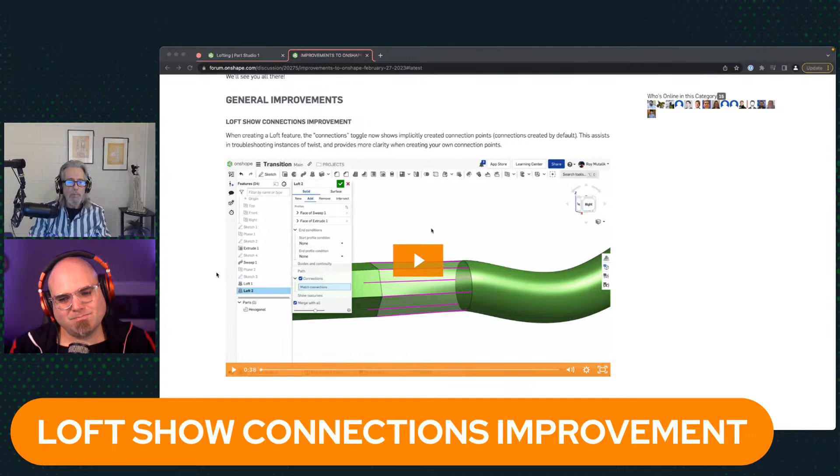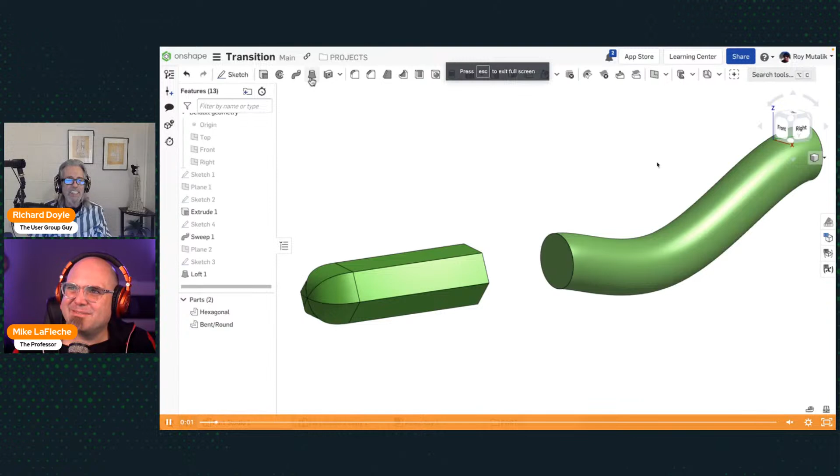All right, let's talk about the first thing. This one I actually like a lot, because it's actually quite flexible, no pun intended. People sometimes want to twist, and sometimes people don't want to twist, right? I did, I got a kick out of the video. I assume you're going to show it here, but let's show and then we'll do some live stuff with it. Yeah, but in the description of the video, it talks about troubleshooting twisting, and then when we get to the end of the video, you'll see why I was a little bit surprised.

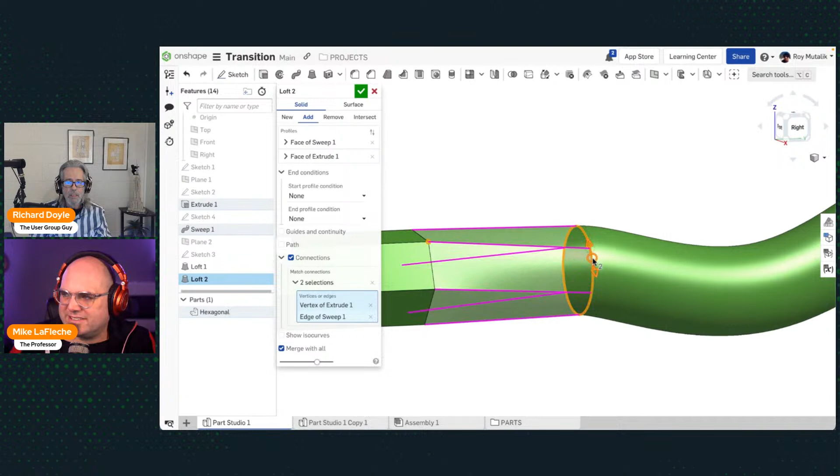So it looks like Onshape did a fairly decent job here with going from the hex to the circle without any rigmarole, it's pretty good. But let's say you want to introduce some twist. Here we're just picking random points, and of course recently, I think several updates ago, we added the ability to move those connection points, but it was actually quite some, what's the word I'm trying to use, like the way the lofting works. You can do a lot of flexible things with it now. And we had those connectors, but they just weren't as available, I would say. They were there, but they were kind of hidden, right? Now they're on full display, right?

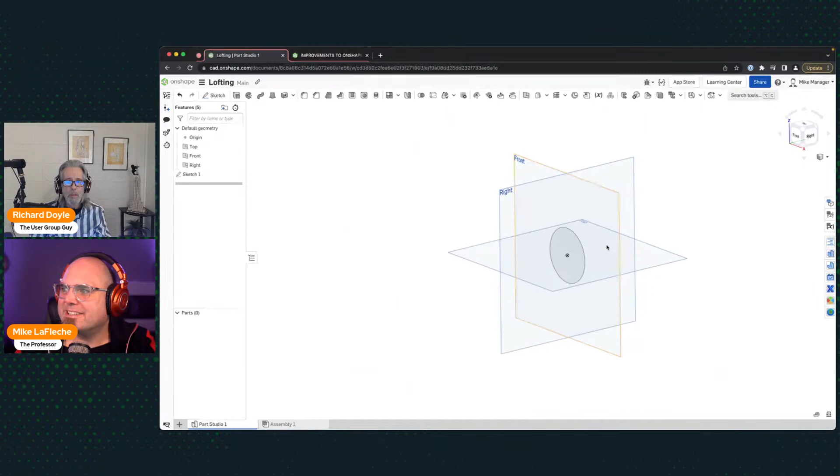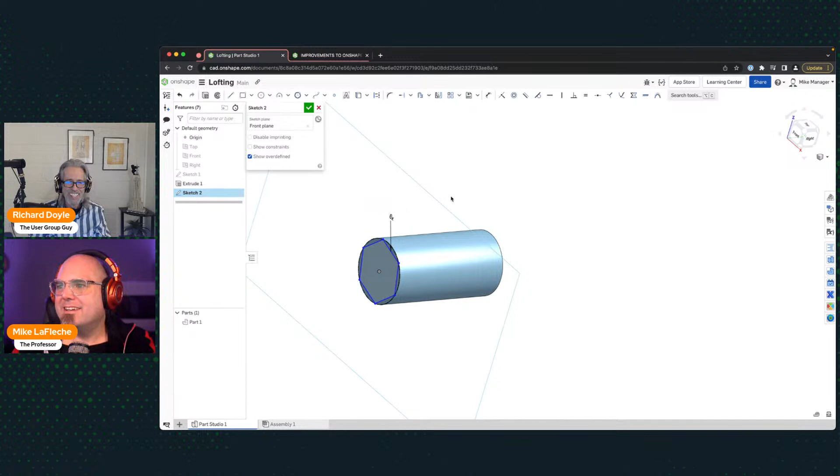Right. Vertical there. There we go. That looks good. Fully defined every time, eh, Toby? Yeah, that's right. You got to have it fully defined.

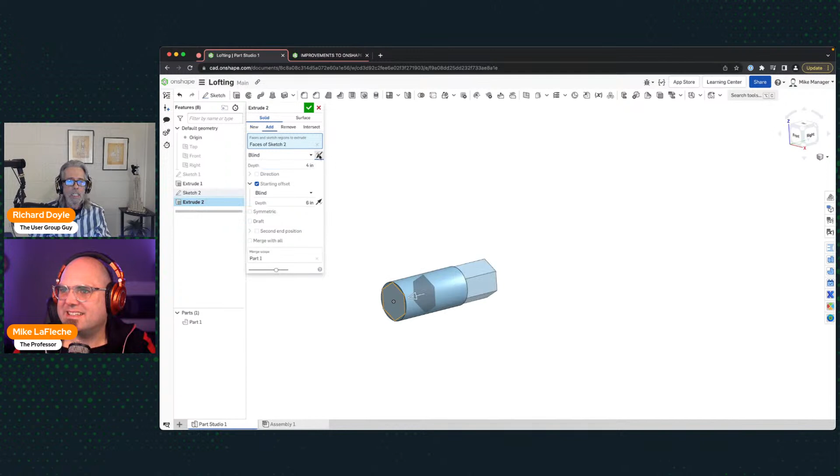All right, so I'll extrude this. If you haven't seen this yet folks, this was new in the last release, the starting offset with your sketches, and that's just awesome. I love that new functionality. Exactly. So now we've got a new solid right there.

All right, so we got a little space. Obviously you could control this by splitting it up into 6 segments. Sometimes you can do it, but sometimes you have to. But let's just go face to face, right? Because you can do that too. I didn't need a sketch to put those in. A lot of people don't realize you can do that.

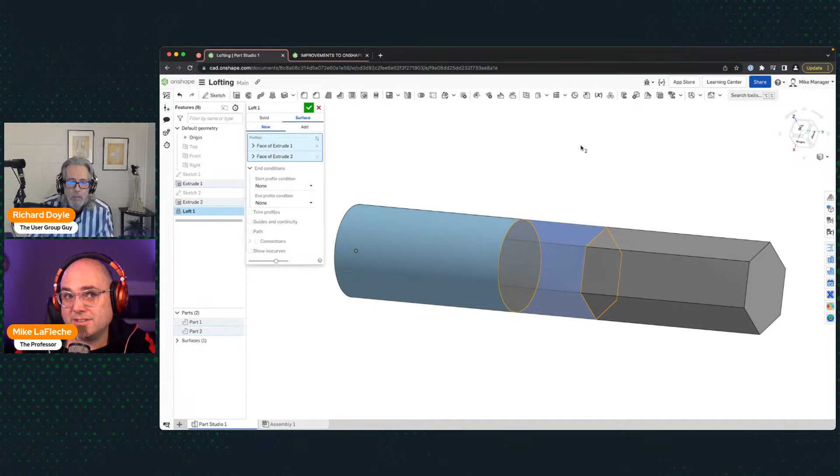Yep. But here are the connections, and you can see right away the live preview. It's the first time I've tried this. And now, of course, I can just take... oh, that was the wrong one to move. There we are.

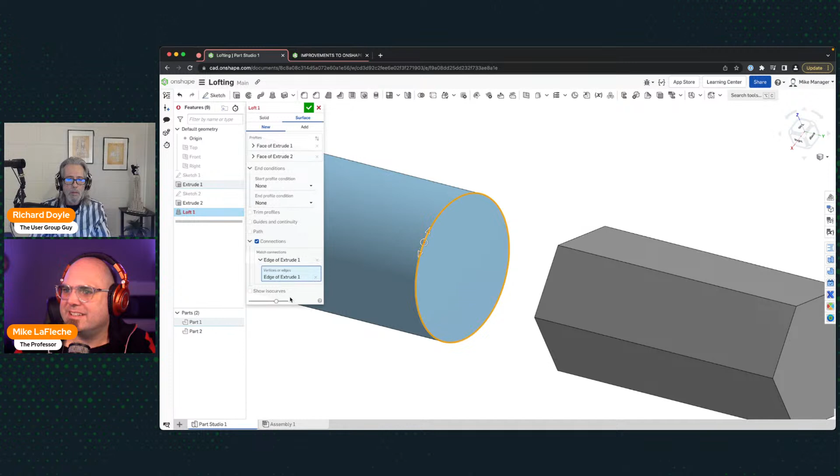Now I can just go in and work it around. Let me turn that off just for a second. Try that. All right, there we are. So I picked the beginning point and the ending point that I want it to work with. Right, and now I can just drag that out. And of course I could start with a normal to profile or things like that to do some more interesting blends, right?

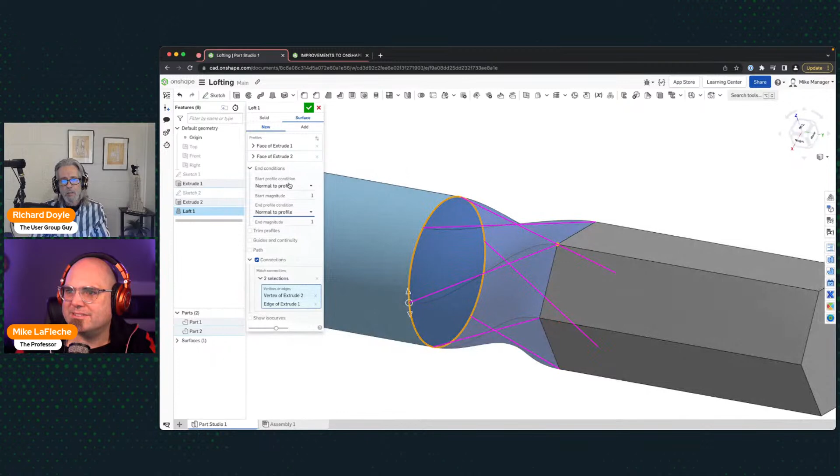So that's another surface right there. I could have told it to add it and merge it with all the pieces. Well, let's see, there might be something popping up, but you can see that's pretty easy.

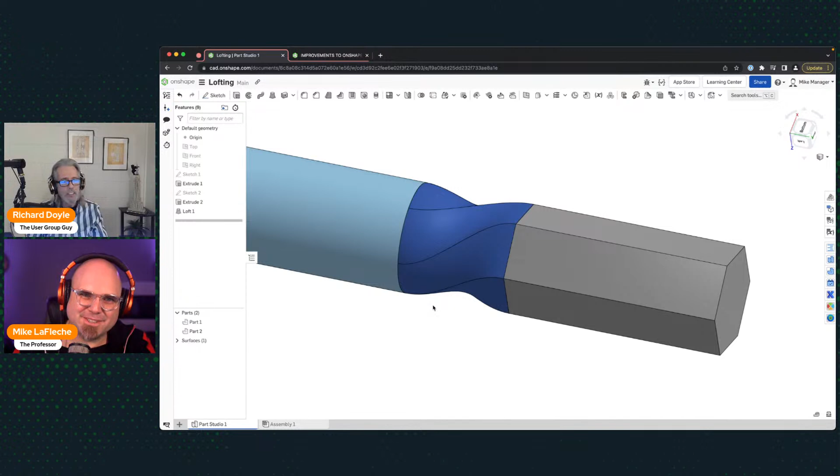Now we can introduce a twist with your loft on purpose, or you can troubleshoot that accidental twist. Yeah. Accidental twists are easy to troubleshoot now.

So wicked easy. The easier and easier these surfacing tools get, and different things - it doesn't always have to be a surfacing tool, but things like lofts and sweeps. The easier they make it for people like me to do that, the better chance I'm going to have of ever learning how to do really good surfacing. So yeah, I appreciate that.

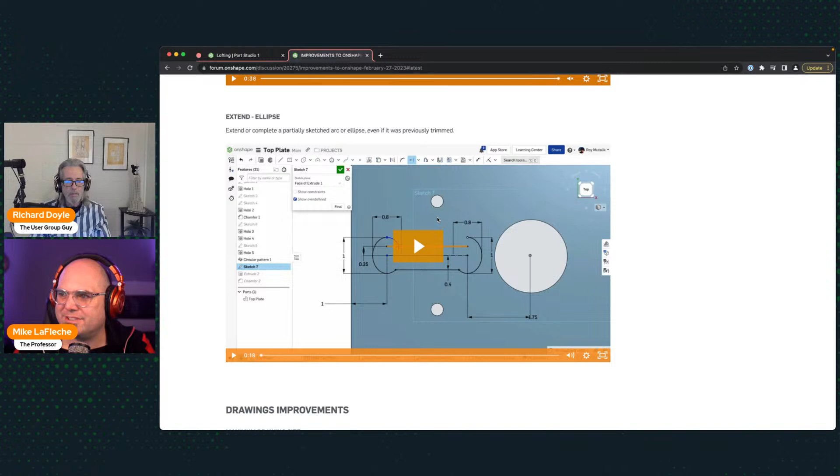I'm in the same boat. I haven't done a lot of surfacing lately. I've been getting ready for Onshape Live, doing some surfacing kind of prep, and it's really given me a new appreciation of what's happened in the last year or so with the features that have been added. And I've seen that model, and it's a really good one too. Cool, a little sneak peek. There it is. Nice, yeah.

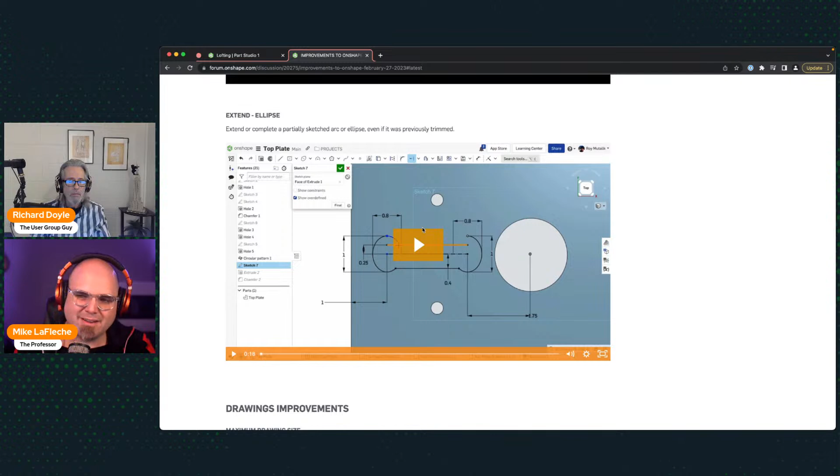Anyway, extend ellipse. So of course there's lots of sketch operations you can kind of get by with, but this just makes the quality of life when working with any kind of elliptical arcs better, especially when trimming and extending and doing things like that. So essentially, let's play the video here.

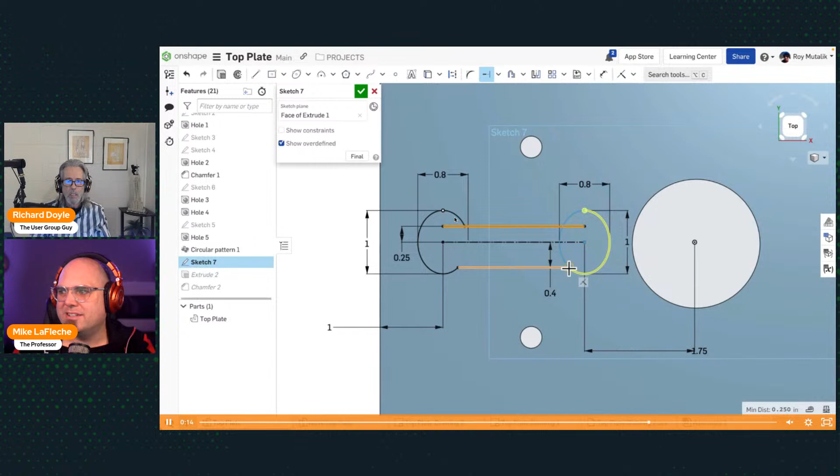See here, we have a nice kind of dog bone shaped slot, and we want to take this elliptical shape that we drew as an ellipse and just use the extend tool. You can go to existing points. You can fully close an ellipse to get it back in, or a circle or an arc actually. So if you've trimmed a sketch circle, or if you've created an arc, you can actually close those as well.

Oh, interesting. Yeah, you've had a chance to play with this, it sounds. Yeah, just a little.

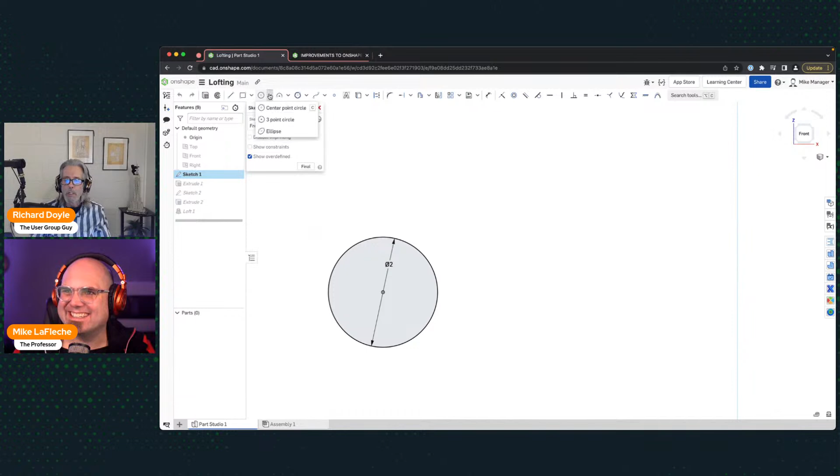And I will warn everybody ahead of time that's going to try this for the first time - if you came from some other CAD systems, you can't drag the points together yet. I want everybody to go ahead and submit that as an enhancement request. We'd love to be able to drag those points together. But for now, you'll need to use the extend tool to get that done.

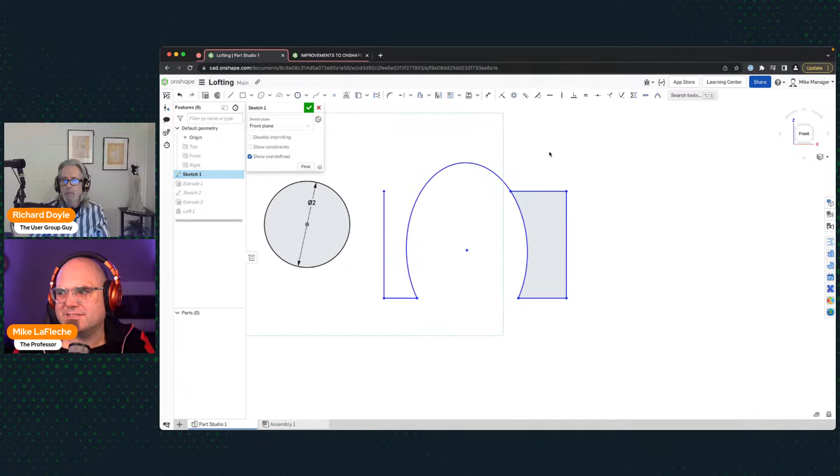Yeah, you can see if I try doing it like that, it's not quite going to do it. But if you hit the extend button, it'll go right to the ellipse itself, to that horizontal line. It works perfectly, and you have a nice entity to work with right there. So it's nice, good stuff, good sketching improvements.

Cool, all right, basic stuff there. Let's continue. All right, this one is for those airplane designers out there.

Or frankly, anybody who needs to produce output that can be used for cutting on a water jet or something like that.

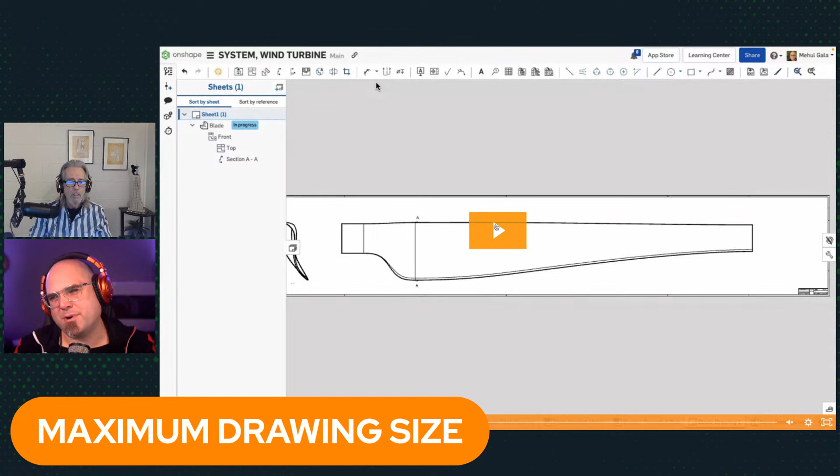So the maximum drawing size. Exactly, so we're not limited to a certain shorter range. Now the range is much larger to accommodate if you needed to do a full size print of this wind turbine blade, which actually you probably couldn't do because these blades are like football fields long sometimes. But instead of a 1 to 128 scale, you might get away with 1 to 12 or something like that. So there's tons of long, slender components that you need a scale print for.

And in this case, a wind turbine blade is obviously something I've seen before. It's a print that I've been to many manufacturers of these over the years, and I've seen prints like this in the past where you have the big long scroll.

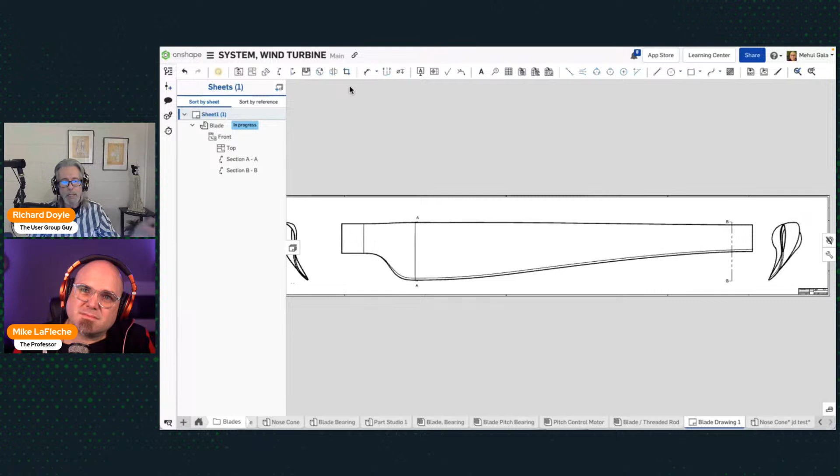I am reminded of a story when I was 19 years old working as a mechanical draftsman for a little scale company. They wanted me to create a flow chart big enough to be read from our booth at a trade show. So I actually drew it on a rolled up piece of paper that I kept unrolling and unrolling. It turned out to be about 20 feet long at one point, and just D-size high. It was a combination of mechanical drafting with pencils and Kroy lettering. I don't know if anybody remembers the Kroy machines.

So it was fun when I saw this. I kind of harkened back to 40 years ago.

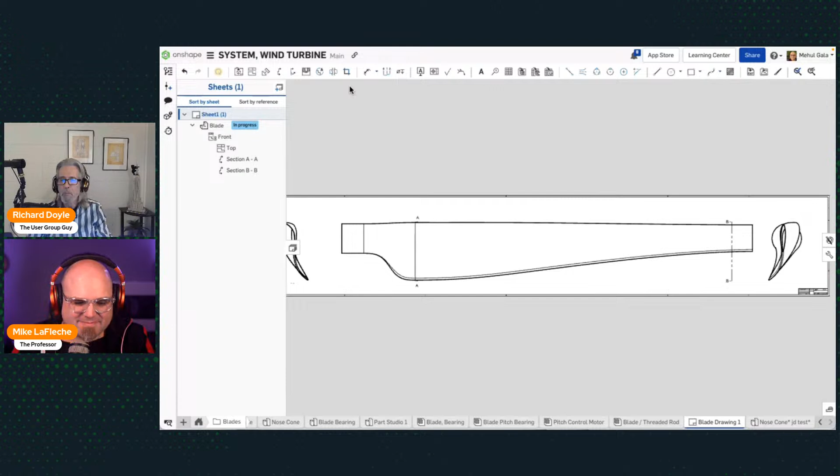So yeah, you would just go in, and I presume, let's just give it a whirl here. Let's create a drawing of this piece right here. Custom template. Let's go ahead, might as well go feet and inches for something like this.

Where are we? Let's do this. I think I need to change it after. I might be wrong, but you can be wrong with me. All right, let's see, format, custom. I think I will probably have to make the format. If I read the actual thing, the maximum size of an Onshape.

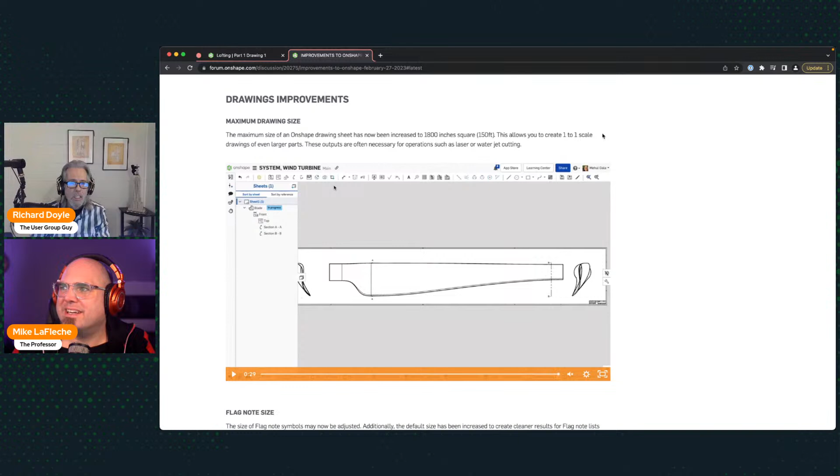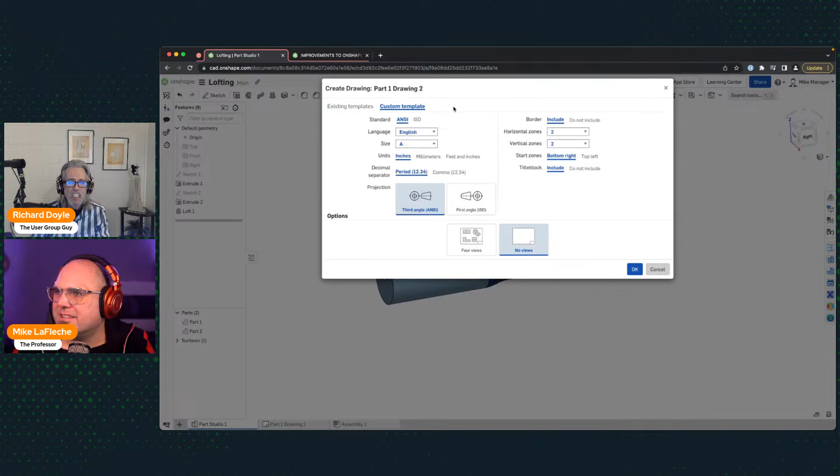Okay, these output, I am betting at this point that you would make your template. Yep, the size that you wanted. And then you'll scale it down to whatever value you have to get your output. Right, let me just try one more thing before I eat my hat. This is one I did not check ahead of time. My apologies. But if I go to custom, I'm not going to see it anywhere here, I don't think.

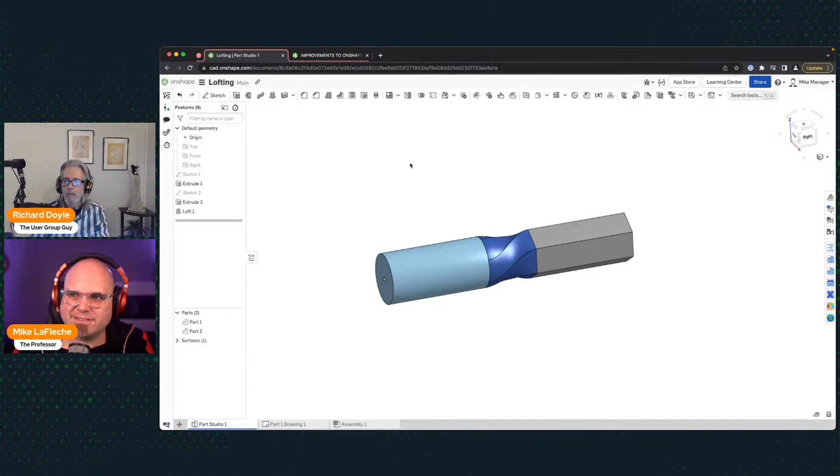Yeah, so I'm presuming that it would be a custom template ahead of time. You import the DWT file and you go from there. So I'll double check that and put something in the show notes for everybody, because I haven't had a chance to try that one out yet.

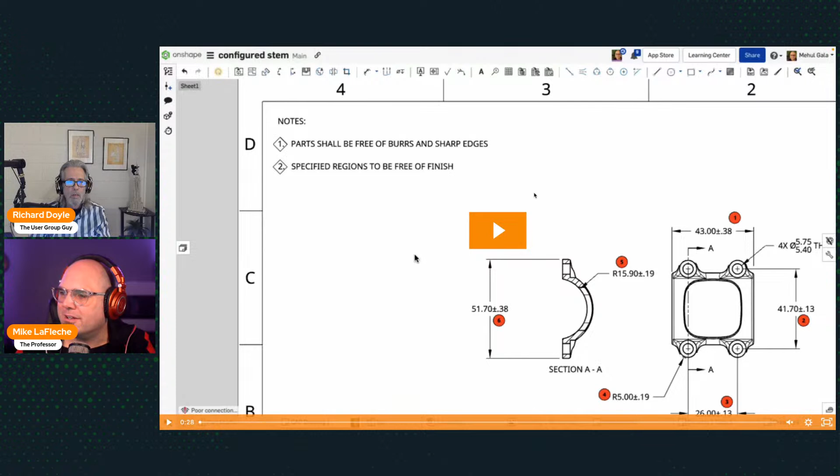This one is actually quite nice, the way the flag notes are evolving now in drawings to have a nice workflow essentially. So it's not just the ability to have a flag note on your drawing, but have the flag notes be meaningful and useful as you continue to work on your drawing. This example does a really nice job. Mehul Gala on the Onshape team did a great job of explaining here.

But we have this group of notes, right? We highlight these and we're going to turn them into flag notes. So that turns them into a flag note, which doesn't have to be a flag. It can be a diamond shape or whatever you want. You just select it, and now we're going to use our call outs, and you'll see the flag note gives us item number 1 and item number 2 in that list.

If you went by that fast, let's pause it right here. There we are. See what happens? That 1 and 2 is actually representing the 1 and 2 of the notes underneath that call out screen. Okay, very nice. So it's smart, it's connected to these notes.

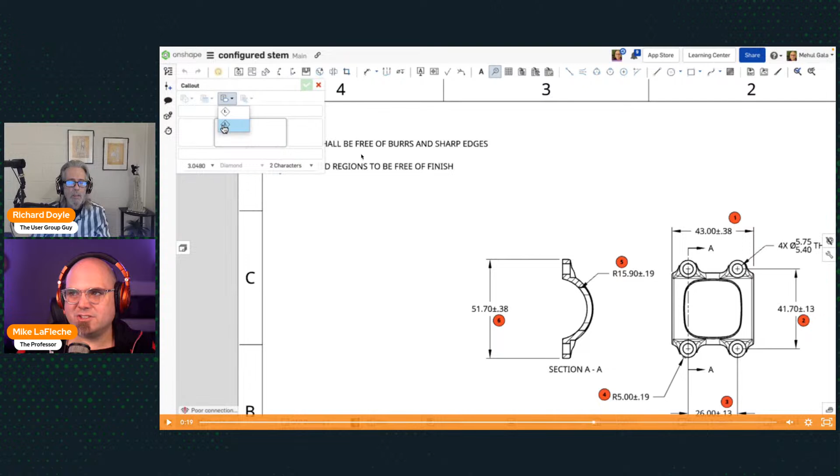Here we are. I want to try some of this stuff out live. Actually, this one's interesting to me. Let's do a note 1. These are flag notes, they are sequential. Make sure that this is a 2. Colors. Forgot that we could actually do this too.

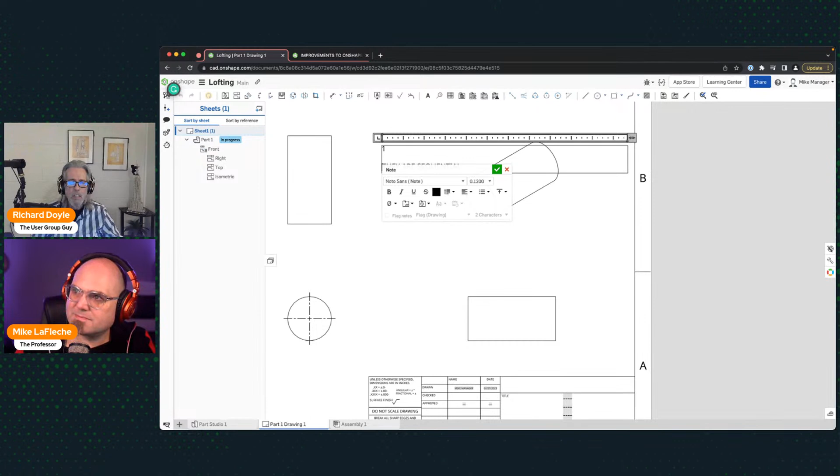Paste. There we are, get rid of that manual number 1. That's a little silly. Highlight both of these, give this a bulleted number list. In fact, they're flags now. And the flag drawing next to it means that's the drawing default for flag notes.

But if I wanted octagons to show up, or whatever, do diamonds like the other one. Diamonds are forever.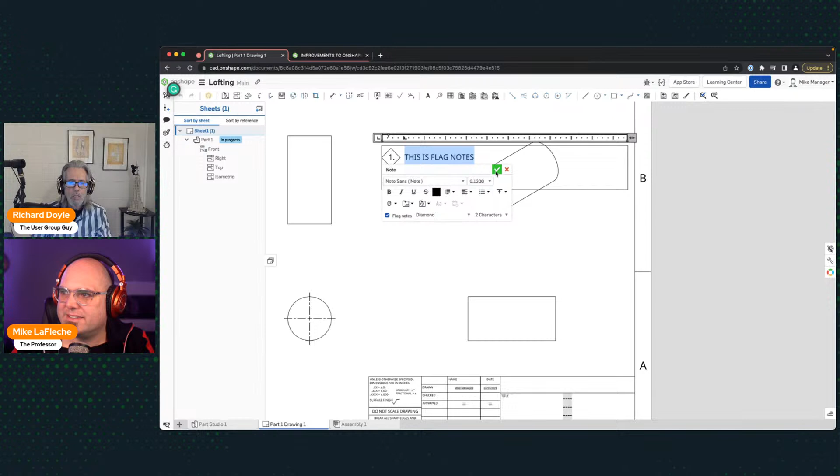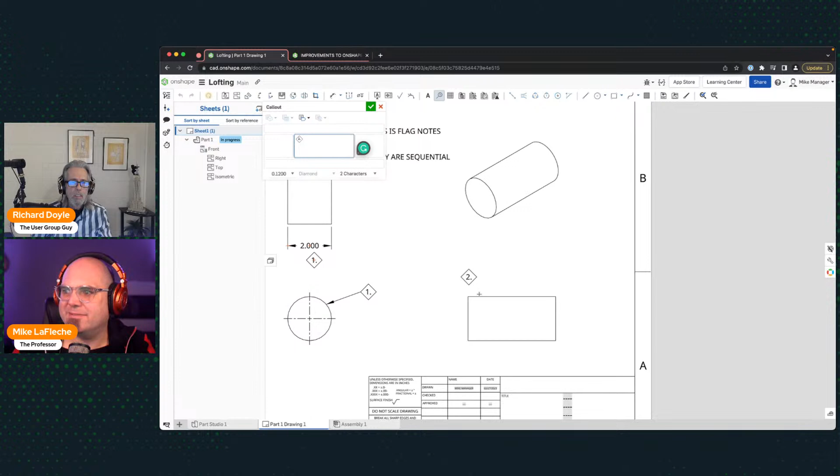And now if I stick a dimension on here, in a callout of a flag note, get rid of that. There we go, there we are. There's number 1, I can attach it to a dimension like that. You can also just pick it on the fly, and that's item number 1. Then you can go down to item number 2 and put it wherever you think you need it.

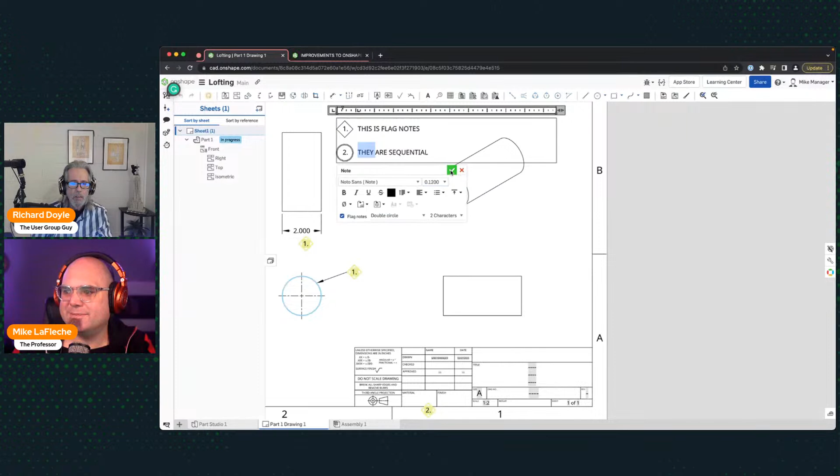And what I want to do, you can see how they all cross-highlight too. That's pretty cool, right? You hover over it and it cross-highlights. They really thought this one through. Let's see if I double circle number 2. Look at that, nice. All right, so this is really done well. I'm really impressed with the detail of the workflow.

Are you willing to try one more thing? Can we get rid of the periods after the numbers? Let's see, double circle. Probably have to undo the flag note first. Yeah, I think that's just the way we're doing the numbered list. So I'm thinking not. Must be standard. If somebody needs that removed though, submit a ticket.

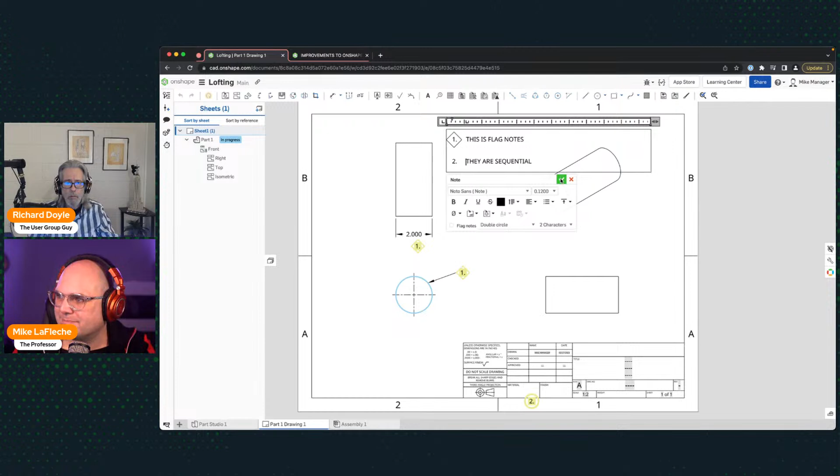But yeah, that's pretty cool. I love the way this works. If I click it here, oh look at that. It works the other way too, see? Click the 2 here, it highlights it in the note all by itself. Nice, all right, let's continue on.

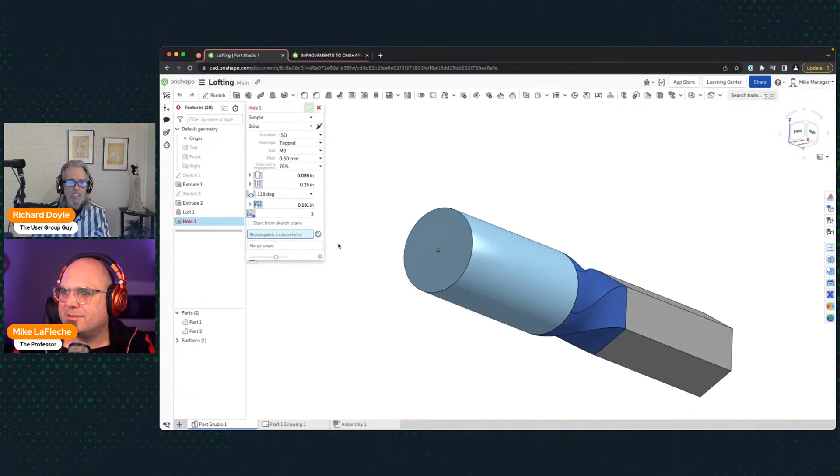Let's put a hole in here on the center of this M3 tapped hole. All right, kind of a tiny hole, but that's all right, just to update our drawing here. So the next item is related to the hole tool. All right, so we have a hole.

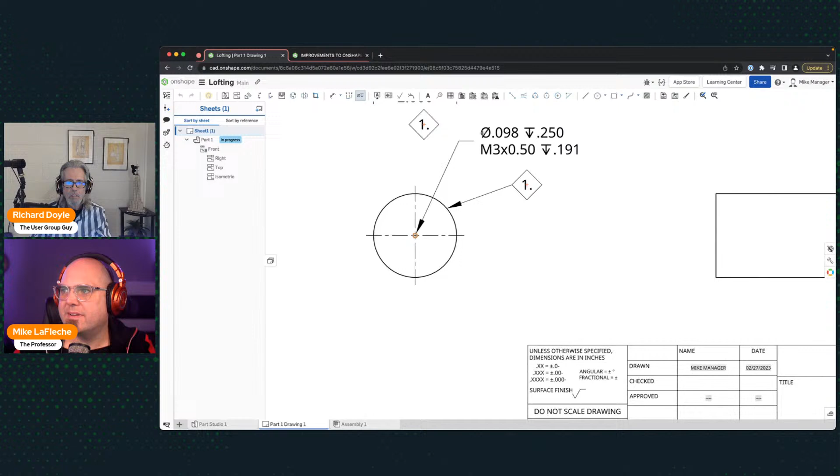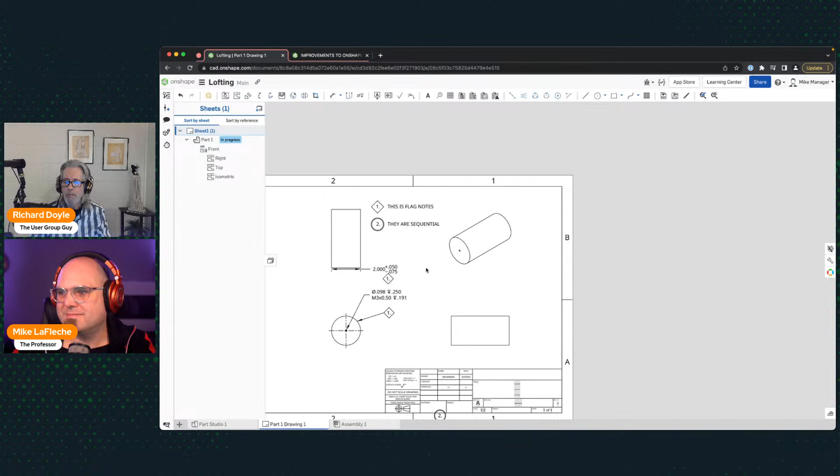We have all these dimensions too, right? Let's put some tolerances in. While you're doing that, I'll welcome Frank Arnaldo Carlos C, joining us from Peru today. Wow, he says he's making a team of many young people to work on manufacturing UTV vehicles. Ah, excellent.

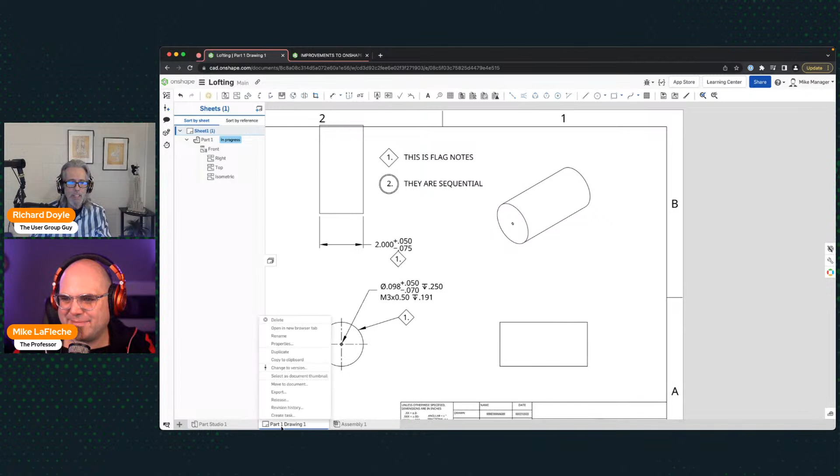So to inspect that, you get your steel ruler or your depth gauge and your calipers, whatever CMM machine, whatever you happen to have at the time. You have to have it, yep, tape measure. I am going to export this as an inspection list. I'm going to store that. I'm going to download it just right now because I need to open that in like some sort of editing program, right, Excel or something similar.

I'm going to go to my other screen and grab my download. Actually, you can get it right there from your window with the bottom left. Yeah, I see it right there. I wanted to tell it to open it in a certain program.

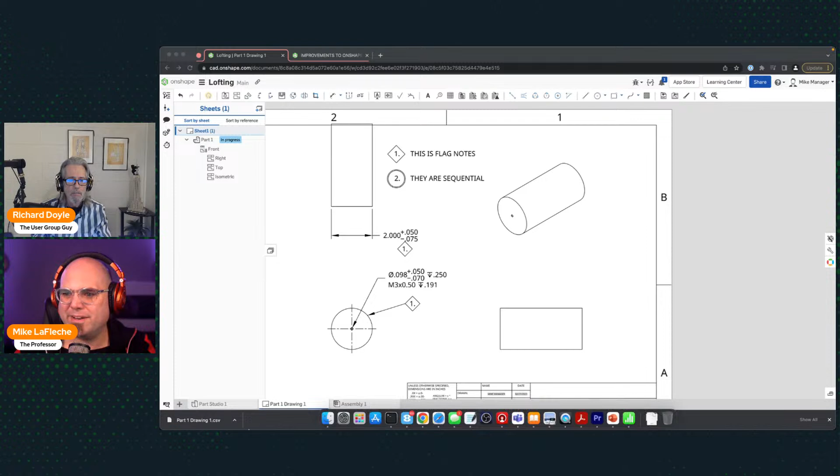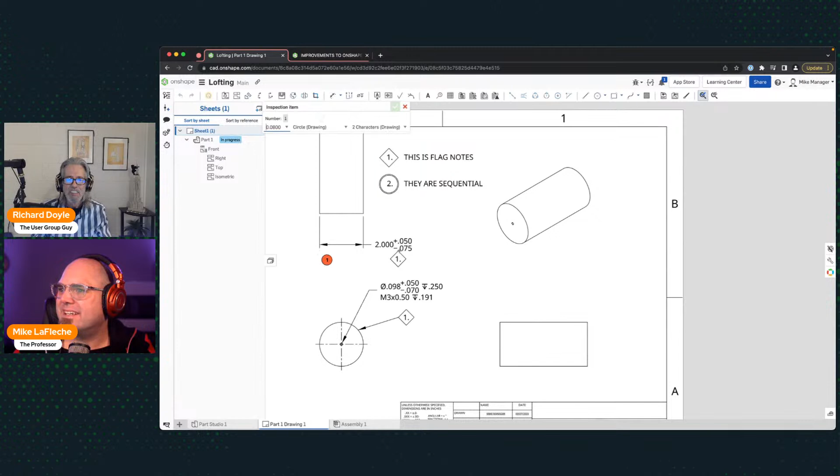Let me get rid of that, let me try that one more time. Oh, I forgot to actually apply the balloons. My goodness, I got an empty report. I do this sometimes, but here are the buttons right here for inspection items. So I can say that that's an inspection item, that's an inspection item, and that's an inspection item.

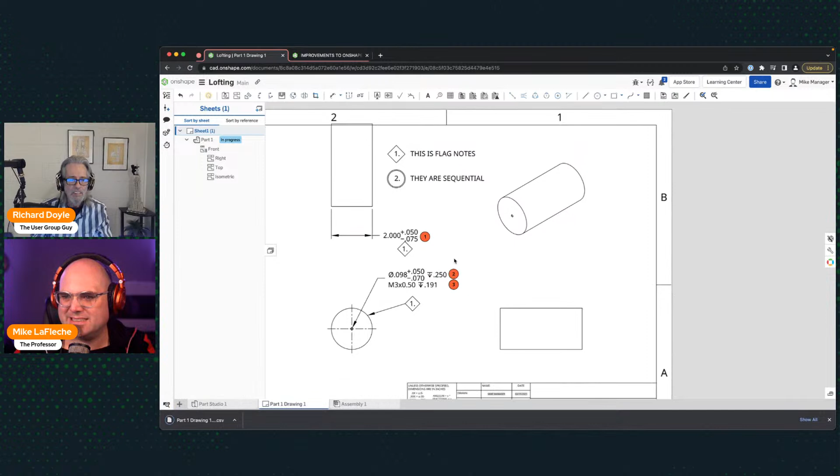Now I would export this. All right, so we'll download that, and I will open that. Let's open it from here, see what it opens in. Oh, there we are, just there we go. Yeah, there's your upper and lower limits now being calculated for a hole callout, which is new. That's what's new in this release.

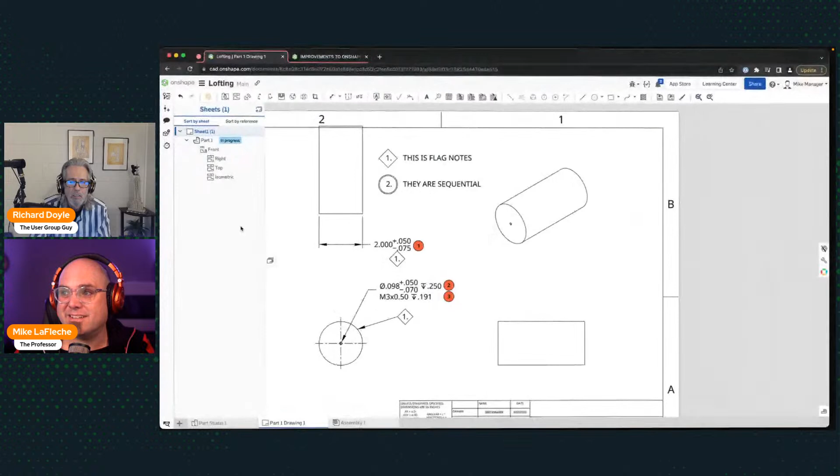So, yeah, we've had the inspection reporting, it's just part of Onshape. Every single user gets this, you don't have to pay extra for this. This is not an add-in program of any kind, this is part of Onshape. Just export your dimensions as an inspection list, and it's supporting more and more tolerance types. Essentially, that's what we're doing. Good stuff, yeah, it seems like every couple updates we're talking about the inspection stuff, which I'm happy with.

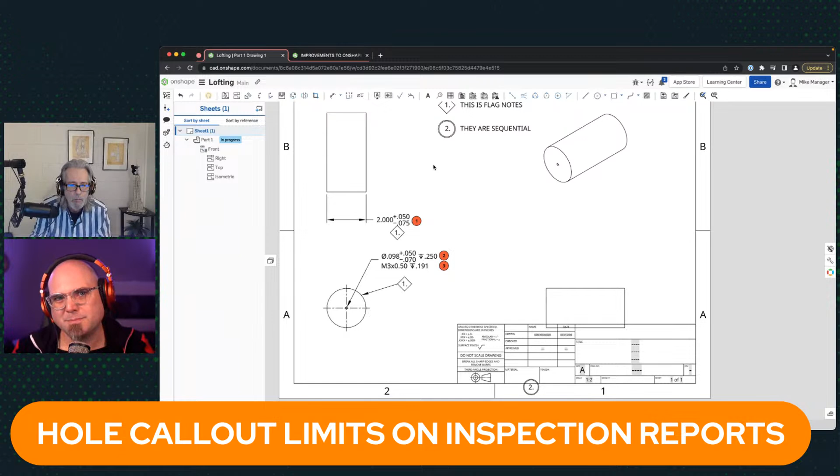FeatureScript improvement. Now, this one is insanely exciting if you're into FeatureScript or any kind of programming. I was so excited to get on this live stream today because between you and what Chad said in the forums, you're going to explain to me why this is so great.

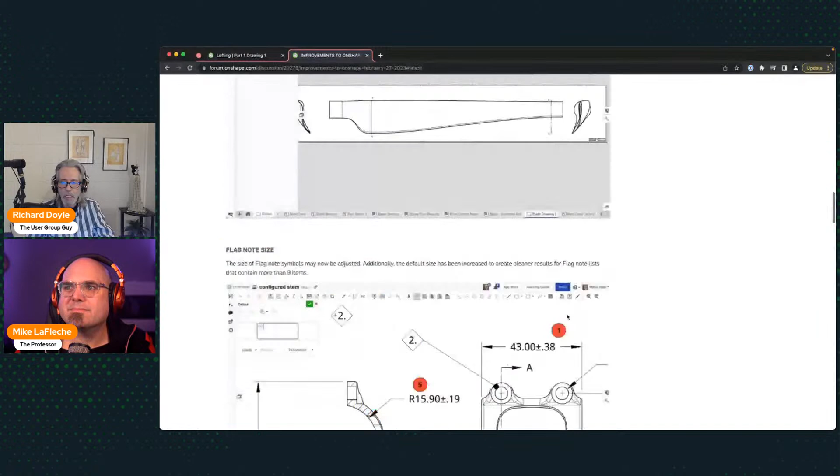At our last user group meeting, we had a pretty new Onshape user come in asking everybody what's the best way, where can I go to learn more about how to use Onshape? Somebody asked him, have you been to the Learning Center? And he said, no, what's that? So we made sure he went there, and we're pretty sure he'll come back to the next user group meeting excited about finding the Learning Center and getting a jump on learning Onshape.

So yeah, that's great. Yep, that's how I did it. That is fantastic. I just had to refresh my screen there.

Sebastian points out that if you look at the change log, there are quite a few more things than what we showed here, including fixes to bugs that might have popped up previously. That change log is always at the end of the new release post, and you can click on it to get a better idea of everything that went into this three-week release.

There's also one here for PCB Studio, for importing and exporting circuit boards. If you have a really large circuit board with every trace and drilled hole, you can now cancel out of that mid-process instead of waiting 20 minutes. So that's good.

And there's some more REST API stuff, so if you're into FeatureScript or doing any kind of programming with Onshape, check out the REST API Dev Portal and some of the stuff in the change log.